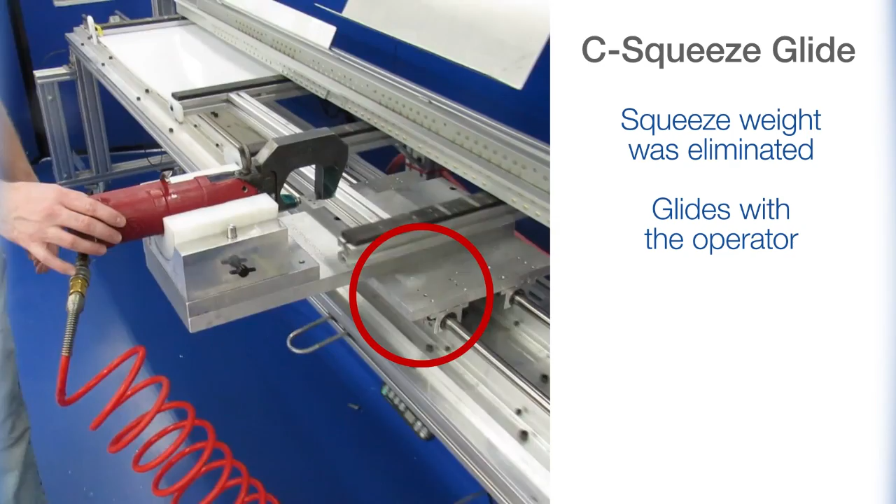Every day, 6,000 people like Stuart show up to make quality products at Appliance Park in Louisville, Kentucky. From washing machines and dryers to refrigerators and dishwashers, it takes hundreds of jobs to make one appliance.

One task in particular was troublesome. I hated doing it. Every time I walk up to the box, like, here we go again. When assembling our refrigerators, operators needed to lift the top off of a box of insulation about 15 times a day. The box lid weighs about the same as 5 medium-weight bowling balls. Its shape is bulky, and the job injury-prone.

And then finally, it just started hurting me. I got a hernia from it. This ergonomic issue really took its toll on Stuart. So we did an ergo assessment, found out that it was an ergo red job. We came up with a perfect solution, a crane.

Using the crane, employees can roll the frame over the box and then use the crane to lift it up. It's like the difference between driving a go-kart and a Cadillac. Just hook up the machine, crank it up, they come off piece of cake.

It feels good. Had an impact on somebody's life so they can go home to their family safely and be able to play with their kids or grandkids. The ultimate goal is to leave work as you came in. Guess what? Before this crane, there were 2 lost time incidences. With an $800 investment in the crane, we can report 0 injuries.

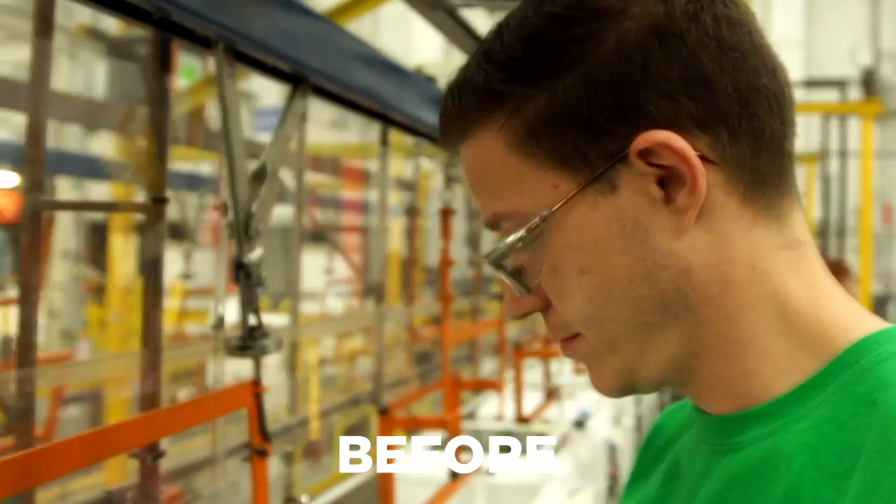Using their hands as a table, they plugged in connectors to the backsplashes, which caused 20 pounds of pressure on their hands and wrists. You're also bending your neck looking down. So now we've got neck flexion as well as the wrist and the carpal tunnel.

We found a way to get that backsplash out of their hands by using a carousel. The carousel holds the backsplashes while the operators push in the connectors. No weight on their hands, no pressure on their wrists for making the connections because the carousel supports all the weight. Now we need fewer operators for that job and reduced the number of complaints for that task to 0.

Feedback from my people is great. They love it. Nobody likes wrist pain, because those are pains you take home and they affect everyday life. It makes you feel successful. It makes you feel happy. You start seeing that there's no more injuries and that the rates are going down.

We put a new spin on an Ergo Red task and immediately saved the business $260,000 a year.

Ergonomic case study: suture automated cut and dispense process. Before: setup of 17 spools, with risk of ergonomic injury due to reach across body. After: setup of 1 spool, with no ergo risks.

Before, if not automated in suture dispense, injury risk appeared due to the need of extraordinary pull force. Also, injury may appear due to pinch grip force and wrist flexion after 2,000 repetitions. Finally, thread length and measurement of suture may cause injury due to shoulder abduction, shoulder flexion, and long reach across body from left to right. After, with automation, risks are eliminated: long reach, reach across body, pinch grip force, wrist flexion, pronation and deviation, shoulder abduction, and neck flexion.

Before, at manual verification of measurement, injury risk due to shoulder and neck flexion, also by a bad posture. After, verification process is integrated on automated process, and a 90 degrees position is accomplished.

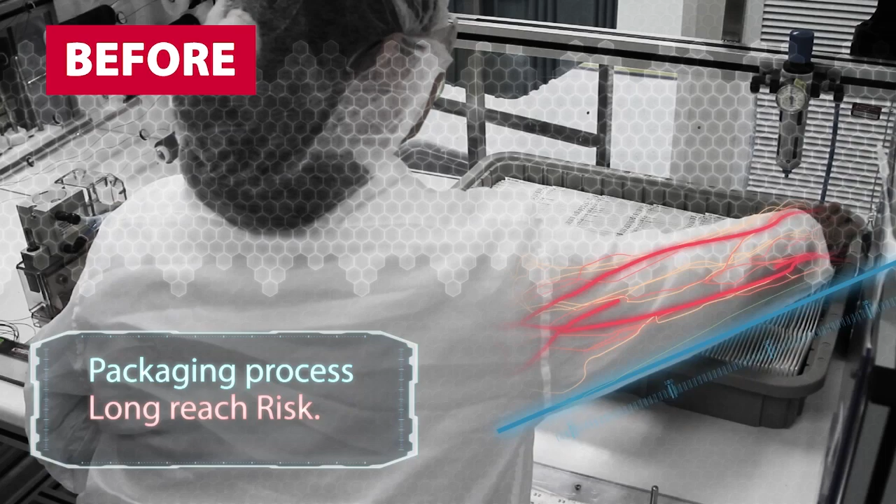Before, on packaging, long reach and shoulder flexion over a 70-degree angle and more than 725 reps. After, work process based on micro pauses. No risk since cart can be moved. Also, there's no long reach risk since packaging movement length is short.

Damaged product from our distribution process and credits and returns area would be placed into a shredder bin for destruction. Operators would struggle when sliding and pushing damaged product into the small opening, causing a possible chance for an injury to the hand and knuckle area.

Damaged product would build up in the front of the shredder bin. Consequently, operators would have to lift up the bin and tilt it back and forth. Operators were complaining of strain and fatigue to the back, shoulders, and elbows.

Operators brought their concerns to management's attention, and subsequently, the shredder bins were unlocked. Unlocking the shredder bin and having a large opening eliminated possible injuries to the hand and knuckle area. It did not, however, eliminate strain and fatigue to the elbows and shoulders.

Operators got together with the Ergo team and came up with a simple design for a push tool to push damaged product toward the back of the shredder bin. When the Ergo team reevaluated the job, they realized the risk of the lift and tilt had been totally eliminated. More importantly, operators were no longer complaining of strain and fatigue to their elbows and shoulders.

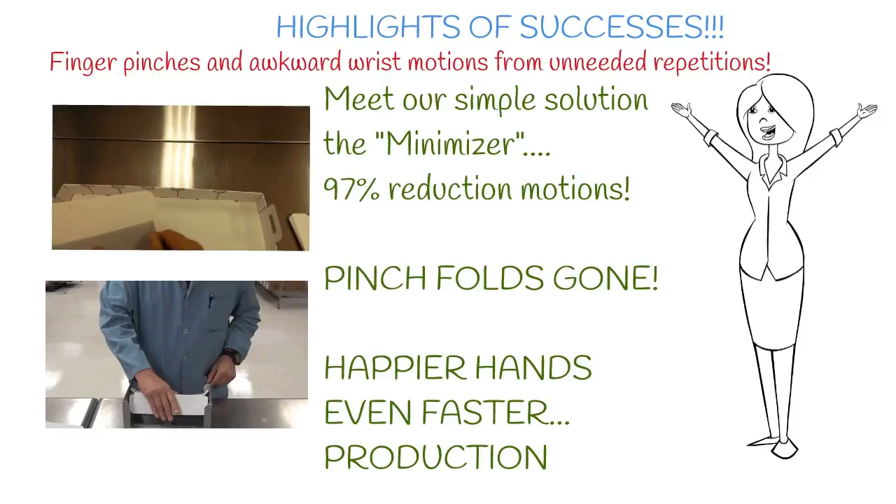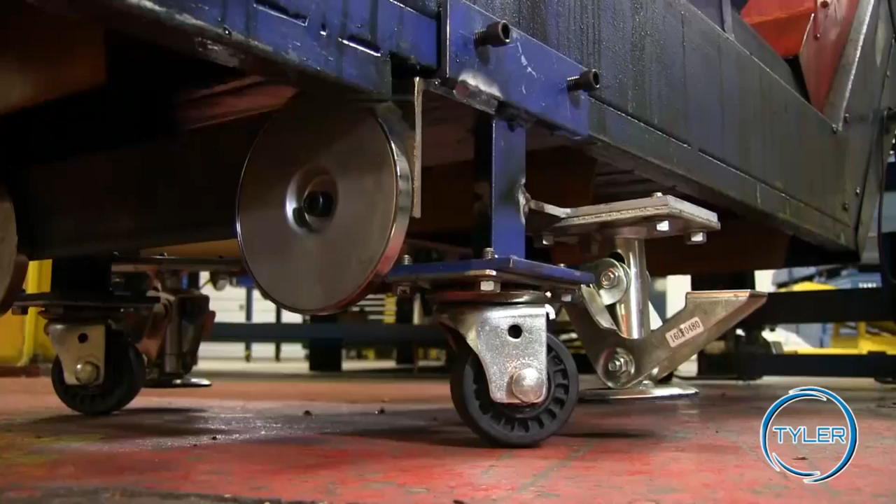The team developed a way to attach caster wheels with brakes to the conveyor. They also added a slide rail attachment that prevented the conveyor from dropping to the floor when sliding out of the machine, eliminating potential pinched fingers, shoulder strains, and crushed foot injuries.

By adding swivel casters and a braking system, along with the slide rail, it made it possible for one person to insert the gasket conveyor into the gasket machine. Just guide it into position and apply the brakes. The new process created neutral body positioning with a 180-pound reduction in force needed to move the unit.

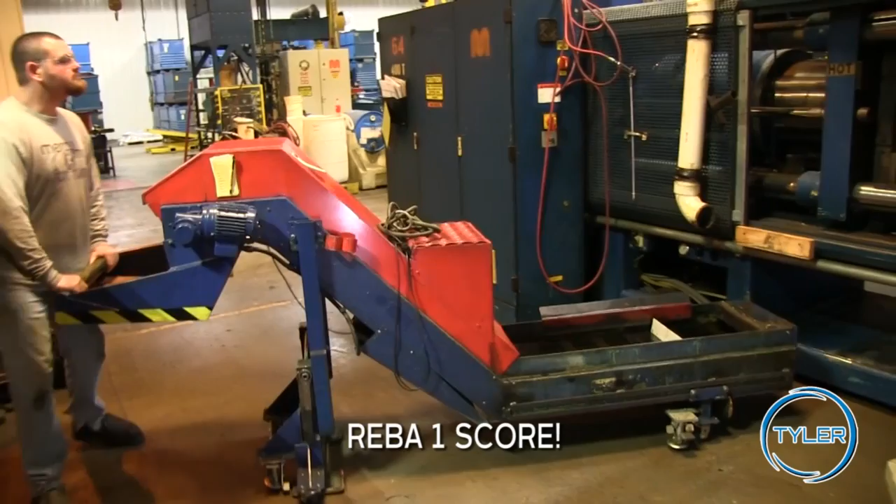This improvement lowered the REBA score to 1, making injury risk minimal. Magnets were added in the front to adhere to the gasket machine while pulling the conveyor out, making for a smooth transition. No more conveyor falling to the ground, no more costly potential injuries.

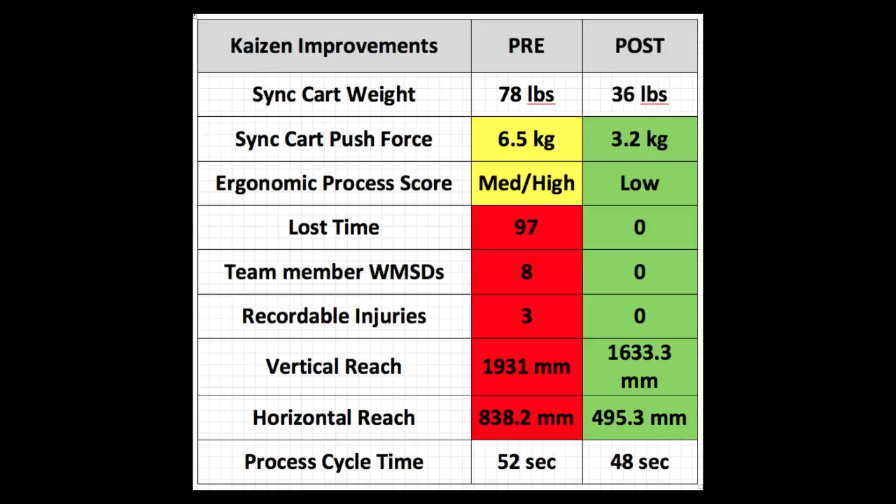In Toyota Motor Manufacturing de Baja California, our biggest commitment is to build our Tacomas with the highest quality without compromising the safety of the members of our team. Reviewing our processes, we detected in the assembly consoles area a red condition, or out of standard ergonomic condition, based on Toyota's ergonomic assessment tool.

We shouldn't twist the hand more than 3 times by element. For this reason, we looked for a solution to the problem. Potential countermeasure 1: gear knob plug-in. Changing the design will generate a very high cost. Potential countermeasure 2: use crank. Generates scratches. Potential countermeasure 3: jig and portable electric tool. Satisfies all requirements and was implemented.

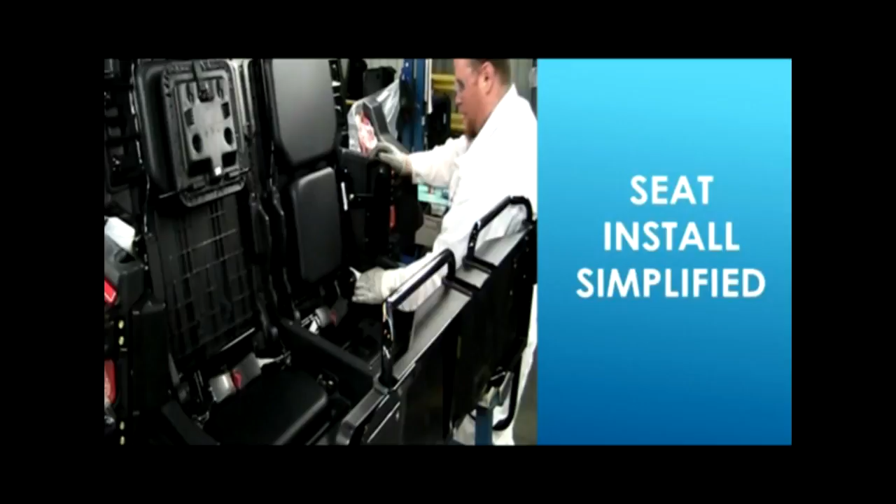At GE Aviation, we repair and overhaul high-pressure compressors for aircraft engines. This repair process involves a conventional die set and a press machine. The conventional die sets are big, heavy, and require long setup time.

Do we have a way to solve these issues? Yes, we do. We combine lean, safety, and ergonomics in our latest innovation, SMED. The conventional die set weighs a massive 165 pounds. But now, with innovative SMED die sets, we reduce the weight to just 17 pounds, eliminating manual handling of heavy loads.

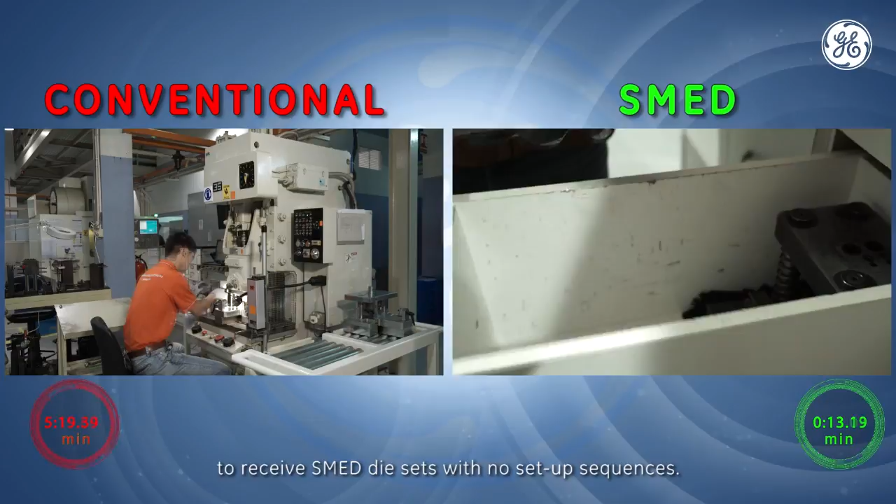We modified the press machine by installing a master base to receive SMED die sets with no setup sequences, therefore achieving total removal of awkward postures and forceful exertions. The SMED die sets are much lighter and simpler. This greatly reduces the ergonomic risk of this repair process.

Okay, what we have here is the assembly of what's called a mini liquor rack that goes in our 450 and 550 aircraft. They each have credenzas in them. These are plexiglass parts that come to us from the CNC, and when they come to us, the corners are rounded. What we have to do is square the corners out in order for everything to mesh together.

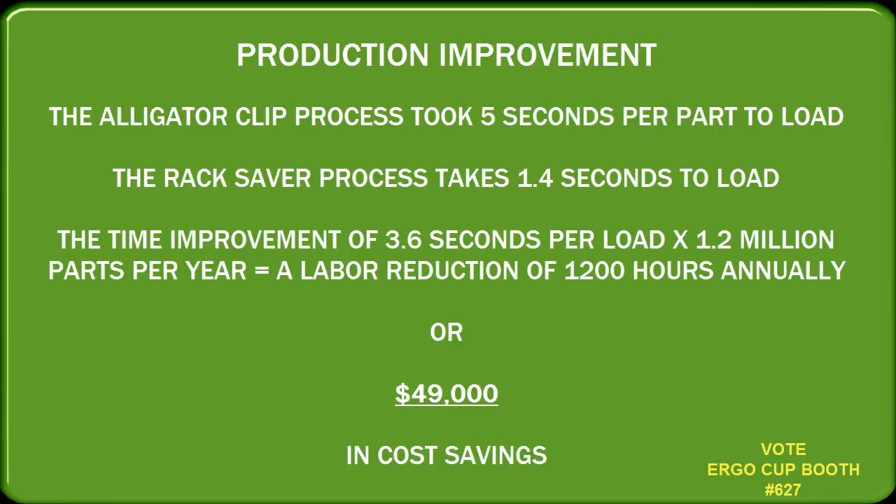A team of engineers and technicians at Los Alamos National Laboratory developed a new potting process for the fabrication of detonators that reduces ergonomic injuries, reduces processing time by more than 20 hours, and improves resin quality.

First, they measured the process using Lean Six Sigma tools to understand the root cause of the problem. Then they analyzed the data to improve the resin's performance.

Using the solutions the team implemented, the new potting process now takes only 2 hours, has superior quality, 0 rejects, 0 rework, and best of all, 0 ergonomic injuries, making it the most efficient manufacturing process in the entire detonator production agency. New microscopes were installed to allow technicians to work more ergonomically during visual inspection.

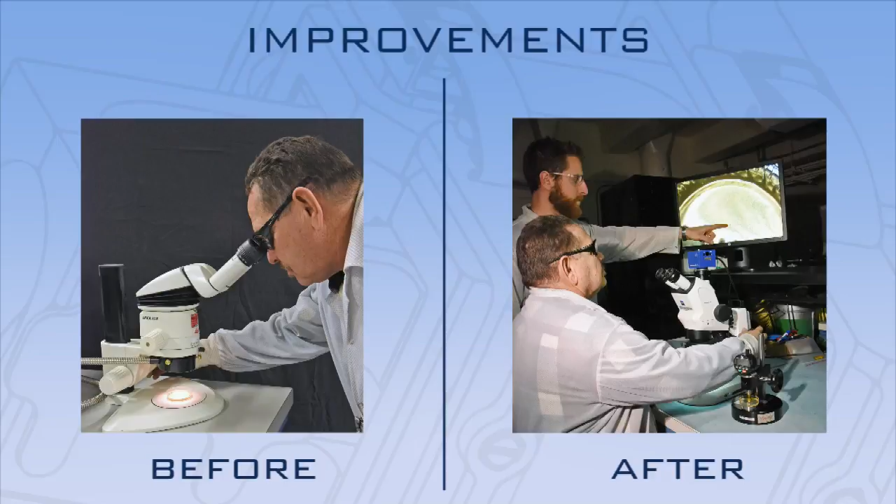The RTV mold received vent channels to improve the potting fixture assembly. A high shear mixer was added to eliminate technician fatigue or musculoskeletal strain, and an ingenious solution eliminated the manual screwing and unscrewing of 480 bolts.

A new assembly fixture design was effectively implemented that included integration of magnetism, light spring load forces, and reduction of metal mass. The improvements in ergonomics, quality, and manufacturing efficiency resulted in an impressive return on investment of $3.5 million.

Every day, 6,000 people show up to make quality products at Appliance Park in Louisville, Kentucky. From washing machines and dryers to refrigerators and dishwashers, it's our job to make sure our employees go home safe and sound. That's why we had to get a handle on an issue affecting employees on our washing machine line.

Where they had flexion in their neck, they had flexion in their back, there were so many different problems going on. You can see that pushing in a hose caused a bent back, wrist extension, and contact stress on the knees. It made us hurt. We were just tired of it. We started having injuries and a high turnover rate.

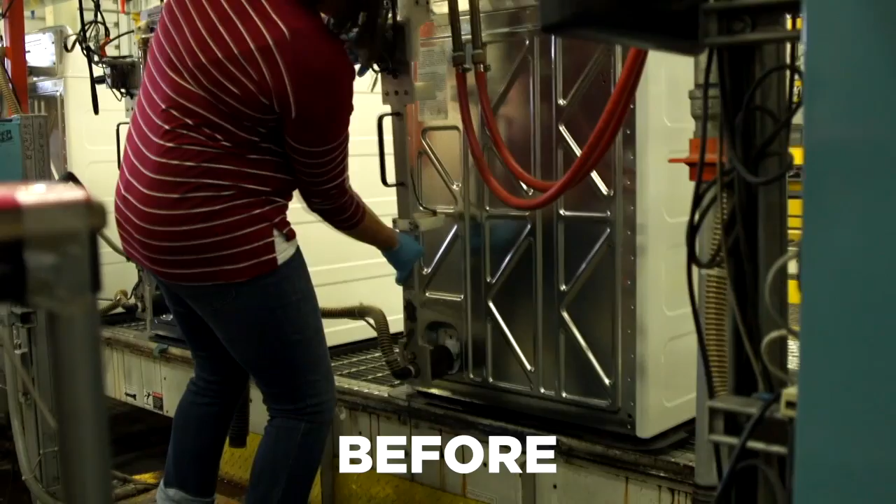To fix this, we created a handle that eliminated all of the ergonomic risks. I wanted to develop something to where they could stand without bending over, a handle that was comfortable. No more back flexing, wrists are in neutral position. It's really fast. It makes the job a whole lot easier.

This simple fix only took $30 per workstation. It gives me a great feeling when I've improved something and the people are happy on the line. In theory, we saved the company over $70,000, and in reality, went from 3 injuries in 6 months to 0 in a year, plus a decrease in turnover.

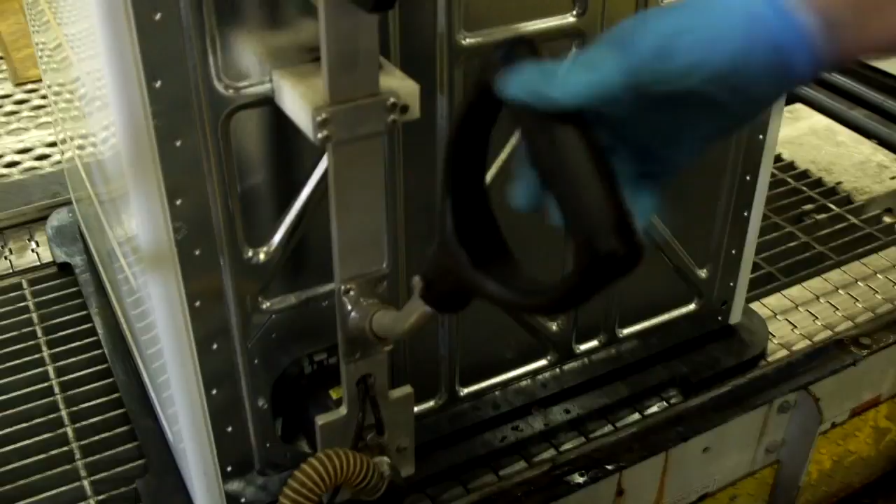How's that for handling business? Oh, it makes me feel great because it makes me feel like I'm important and that they don't want me going home hurting every day.